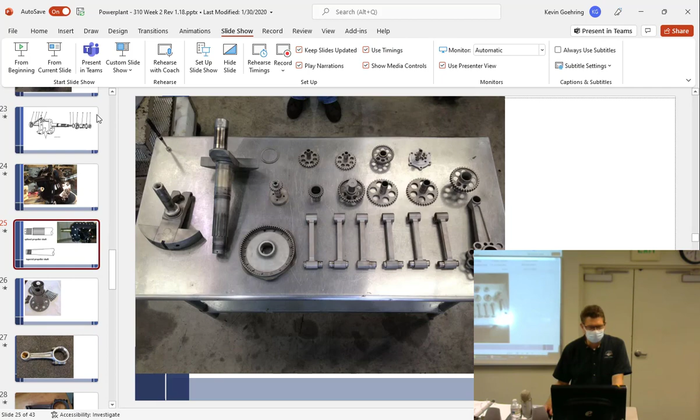I guess I want this one with, let's see, what do we got here? There we go. Oh, there we go. Nope. Slideshow. Where's from? Current slide. What did they do? There it is. There we go.

Little taper shaft. And a spline shaft. Well, that's a taper shaft right there. It's got a keyway built into it. These are a lot of fun. I have a part that I just went to go get, but I loaned it out. And so, unfortunately, I'm sorry I can't. But I got to tell you this part. You can remember this story because it'll save you someday.

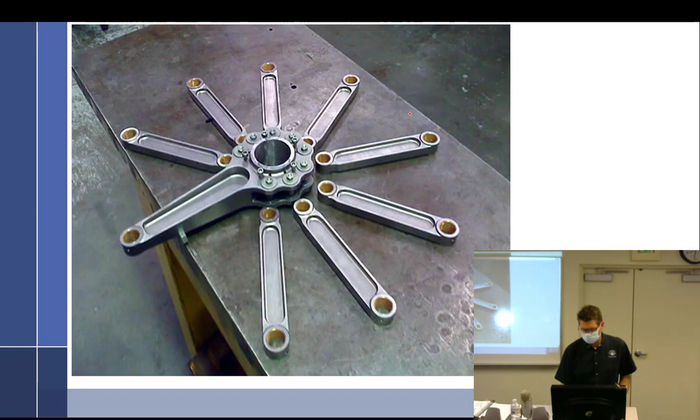If you're ever working on general aviation and you have to work on a tapered shaft, well, how the heck are you going to get a propeller on this tapered shaft? There you go, tapered propeller. No. They don't make such things. So there is a, I thought I had a picture. There we go. There's an adapter that goes on there, and this adapter is tapered. That's the only one I got. That sucks. Okay. So that has got a taper on it.

So you put this on the taper shaft, and you tighten this nut up right here, and it tightens the whole thing down on there. Now there's some things you have to know about that. What you can see back here, there's like another flange that the propeller is going to bolt through. And by the way, the prop bolts go backwards. They go from the back going forward, and the prop goes on, and then this little ring over here, which is a whole circle, goes on top of the prop, and that's the whole thing.

So you can leave the whole taper shaft adapter on if you so choose and take the prop off, but I always recommend taking this off every so often because they tend to want to seize up on there. And there are rules about when you put these on, and I'm really sorry that I loaned out my little shaft thing.

Let me see if this is going to work. Hang on. What do I want? That.

I like to pass it around. Tell you not to put your fingers inside of it. And then a little bit later, I explain to you what Prussian blue is. So Prussian blue is this blue ink, and you put it on parts. So what you do is, and there's a formula, you take like half of what you need, then you throw away 90% of that, and then you still have a little bit too much.

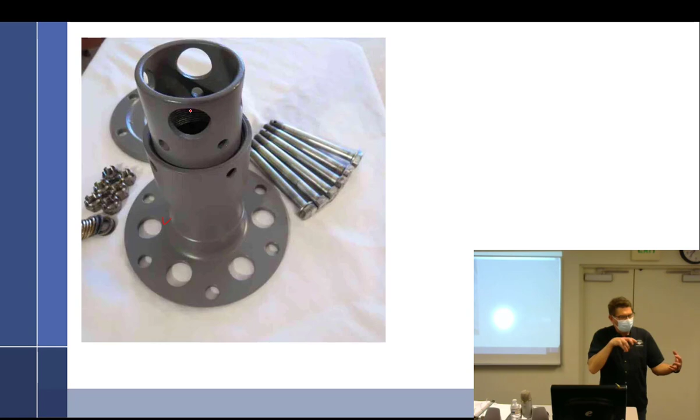the snap ring is not supposed to come out. You leave the snap ring in, and then when you loosen the nut, there's a flange back there on this nut that hits the snap ring. The snap ring then hits the groove that's in here, and as you start to undo this, it gets really tight. And what it does is, as you undo it, it pulls the entire assembly off. It's a built-in puller. And if you don't know that, you're never getting this off.

And that is why mine is missing, because Phil was working with somebody who has a little taper shaft, and they couldn't figure out how to get this off. Well, Phil knows. But I just walked by and noticed they'd taken the prop off and not the adapter, and they weren't getting it off. It's because somebody took the snap ring out and threw it away. So I gave my adapter, and it has a snap ring, so you can take the snap ring out, but give it back. So now you know all about that.

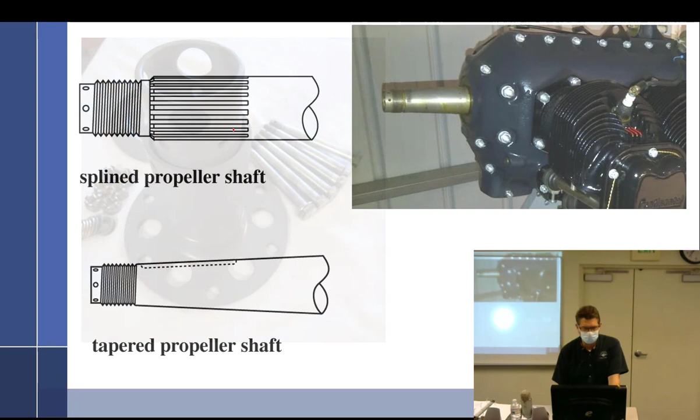So it does have a very large keyway that is built in. So this has got a keyway right there, so you have a key that sticks in there, and that locks it all together so that it stays. I've actually seen these keys sheared off clean, and it's kind of interesting.

So looking at the propeller shaft and the thing that came on there, where the bolt is supposed to go through, how does it go? A bolt goes through what? The big hole at the very top. Right here? That's just for tools to go through. That's how you tighten it. You just put a bar through here. I'm wondering, how do you put the bar through the propeller shaft if there's no hole? Oh, the shaft is down. It ends about here. Oh, okay. Yeah, see it's right here, so the tool is somewhere out here.

And then you see the little holes right there? They line up here, and you put a pin through it. The pin goes from the inside out, so centrifugal force holds it in place, not safety wire. All right, so we got the taper shaft. It has a large keyway. Obviously, if you had a prop strike, I'd just throw it away.

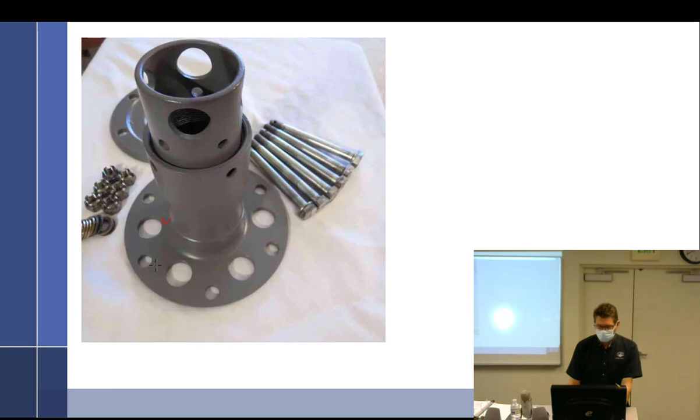All right, so you got the picture. So that's a spline shaft. And if you were to look at a section of it, I don't want to draw the whole thing, it's built like that, but symmetrical and nice. And so those are the splines. There are actually tools where you can measure these splines to see if they have wear. And you wouldn't normally get wear unless there's movement in there.

But the thing about these is there's what's called a blind spline, and that's really important. Sometimes the blind spline will have maybe just a screw or a bolt, but it fills in one of the holes. And that becomes what we call the blind spline. So you can imagine you've got a matching prop hub, in blue, that is going to go over that, and it's going to have matching splines that go down in.

Except, what are you going to do with this one? Well, that particular one is going to be missing a spline. So you have a section that's missing a spline on the prop hub. That's where that goes together, and that way they're indexed and clocked together. So you've got to watch out for the blind spline.

All right, spline shaft. So it has a blind spline. So if you can't get it together, there's your problem. They do come in different sizes. Different sizes according to SAE, Society of Automotive Engineers, numbers.

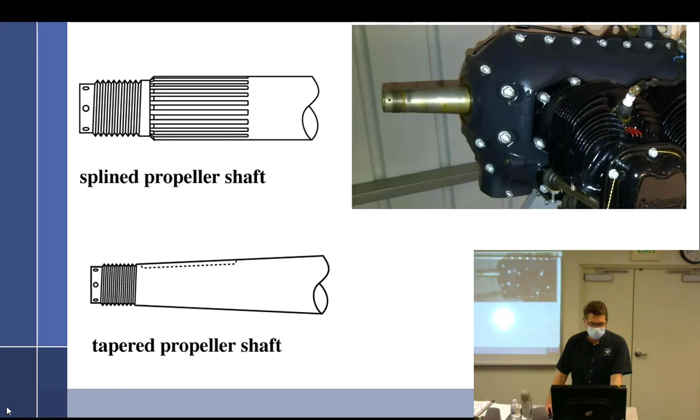And what that does, it corresponds usually to something on the propeller. Sometimes one of them is a bigger diameter. So you'll have five that are the same diameter, and one that's a bigger diameter, or maybe one that's a smaller diameter. And it's important to note that when you're putting this together, because often somebody will not realize that, and so they'll put the propeller on, and maybe this one's a little bit larger, or the way the prop lines up, they didn't have the right hole.

And so as they tighten it up... the prop has one, that's what it is. So one of these is trimmed down just a little bit, and it's made to fit in a hole in the prop that's just a little bit smaller. Right? And so if you get it clocked off one, say they're all sticking out the same dimensions, you have the small hole on the prop on the big bushing. Then when you tighten up all the bolts, it just pushes this one right out of the back of the flange.

And so you see that. You'd be working on a plane, and sometimes, especially on 4-cylinders, you can really note that it's kind of in the wrong spot. And then you go around the back and see one bushing pressed halfway out. So you've got to make sure you get it on the right one. There are service instructions from Lycoming that tell you exactly what the bushings are and where they're supposed to go. And props are clocked a certain way, sometimes depending on the dynamic counterweights. Most 4-cylinders are the same. But anyway, it's important that you get it together correctly.

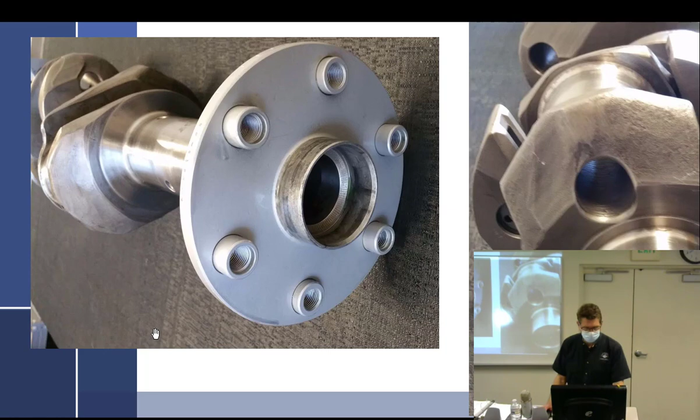Well, that's on you now, right? You need to make sure that it goes back on the right way. Yeah. Are props dynamically balanced on the crank or off? Dynamic means on the engine running. Okay. Static means off the engine. So it could have been dynamically balanced incorrectly mounted on the prop, or on the... Could have been. Yeah, okay. Not likely. Doesn't happen often, but could.

So if it was done incorrect and then balanced like that, would you have to then? Yep. Then take all the weights off, have it rebalanced. You guys are going to learn. We have a nice balancer here. I haven't even used it yet. But you guys will get a chance to do it in second year. Learn how to do it. It is really nice.

You can do my plane for me?

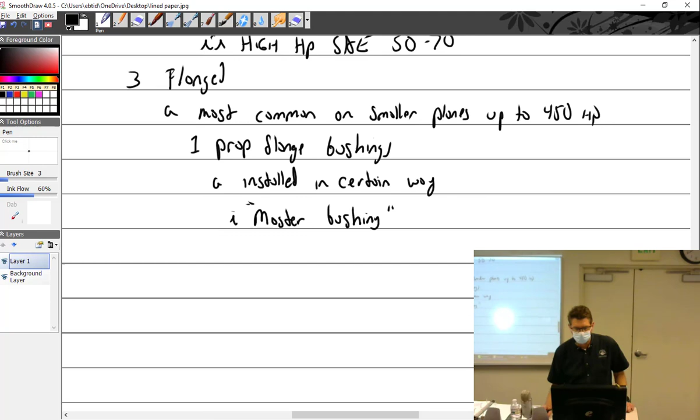Sure. All right. So prop flange bushings, they're installed a certain way. Installed in a certain way. I was just talking about the master bushing. Master bushing is different, and used to clock the propeller. Clock the prop.

Where do you think you could find this information? How to make sure it goes on correctly? Manual? What manual? Overhaul manual for what? For the propeller. The manufacturer's manual for the propeller? Okay. Anybody else? The engine manual. These are all good guesses.

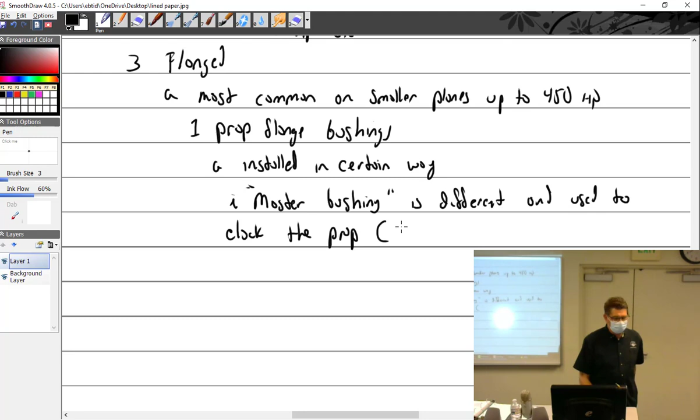Something you have to realize about this whole system is when a propeller is made, there's a propeller manual and the propeller company, and they're all into their propeller. And then it gets sold to the airframe. So, you know, I got a McCauley propeller, they sold it to Cessna. And I got a Continental engine, they sold it to Cessna. Cessna gets to decide how that stuff's going to go together.

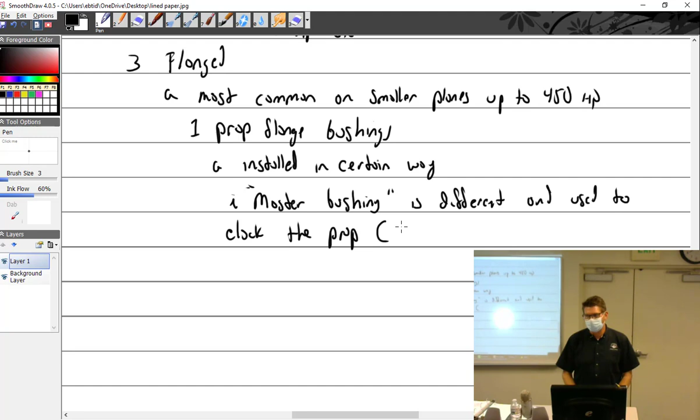But interestingly enough, these bushing placements are in Service Instruction 1098 for Lycoming, because they'll tell you where to put their bushings. That's an engine manufacturer saying where they want the bushings. But ultimately, the way it's installed is up to the airframe manufacturer.

Let me see. I think now I've totally screwed up my outline. Gonna skip something, so I'll remember for now, but I'll forget in a minute. Crank gear pad. What am I writing? Pad. All right, pictures. What do we got? We got this from down here. All right, so here's crank gear pad.

Now, it's nice that you guys have already started working on an engine, and maybe you remember how this goes. What goes right here? The gear. How is it held on? A bolt. And what happens if that bolt falls out? Nope, there's no oil there. Okay, no gears are going to be rotating. What's that stop? Everything. It's a bad thing, right? It's a pretty big deal.

Although on top of the crank gear is the oil pump. So the oil pump kind of holds it down, which is kind of interesting. But once it's loose, it starts to work its way out. So this has caused quite a few problems. And for many, many years, it was just Lycoming that had a problem. Then Continental joined in, even though they have, I think, 4 to 6 bolts back here, depending on the engine model. They just had a problem with some bolts.

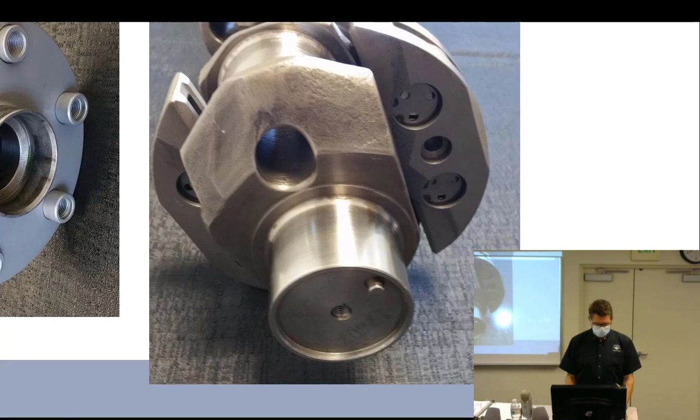But here's Lycoming's problem that you need to know about. There's only one bolt. And it's never a problem until it's a problem, right? And you guys are fortunate, you have the gears that they don't want you to use anymore. Your gear is a complete circle, and it filled this all up. And you're really going to want to pay attention to this, because when you get to the instructions, you're going to go, I don't understand these directions at all. So I guess I have to get rid of that and go to this.

All right, so you have a gear that is a circle. And of course, it's got a little hole right there that lines up with that dowel pin, and then you've got where the bolt goes here. So what happened is they were finding out that mechanics weren't paying attention, and they were just sticking this gear on the back of the crankshaft, sticking the bolt in, giving it some torque, locking the tab and moving on, and the gear would maybe catch a little bit off to one side or wouldn't seat all the way down. Well, if you torque something and it's not really tight, what happens to that torque? Null and void.

It's null and void, it's not torque, that gear starts rattling around, breaks off, and then the engine quits and the airplane falls to the ground. So they had to fix that, and their fix was scallops.

So what they tell you to do, and you're gonna have to follow these directions mostly, is you're gonna take and put the gear on. Then they want you to clean out the threads, then put the bolt in and measure it to make sure it's going down far enough, then take the bolt out. Then you're gonna put the gear on, and they tell you to use a hammer and hit it. You're gonna listen - I keep telling you guys, use your ears. So you hit this and listen for a sound I'd describe as solid, so you can hear it resonate through the whole crankshaft. Yeah, that thing's really sitting hard.

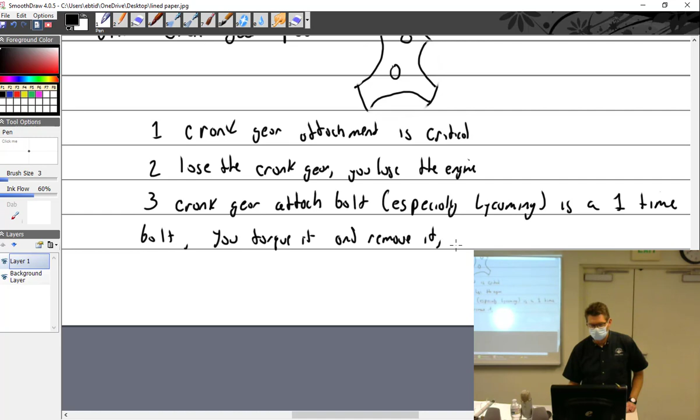And this is where Kelly, especially Kelly, boy, if you're not honest with her, man, she will let me know about it, you know, and she's not... I'm right behind her, but she just really brings it home and will tell you all the time.

It's hard being an aircraft mechanic sometimes. You make mistakes. We are human. That is the downside of being human. You are going to make mistakes. I made a bunch of them. The thing you don't want to do is let one mistake become another one. So when you make a mistake - hey, I torqued this down, I accidentally over-torqued it, or my torque wrench was set for the wrong thing, I thought it was right, I just missed it, I went over by 5 foot-pounds - be honest.

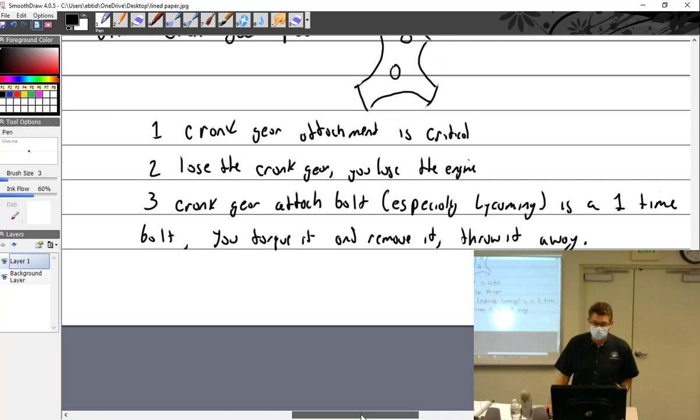Take it out, throw it away. Yeah, sometimes the boss will be pissed. I had to be in that position, and yeah, it kind of pissed me off sometimes, but then I would always have to come back 5 minutes later and say, you know what you did was a good thing, that you told me and did the right thing. I'm really happy about that, and you're not in trouble. So make sure you do that.

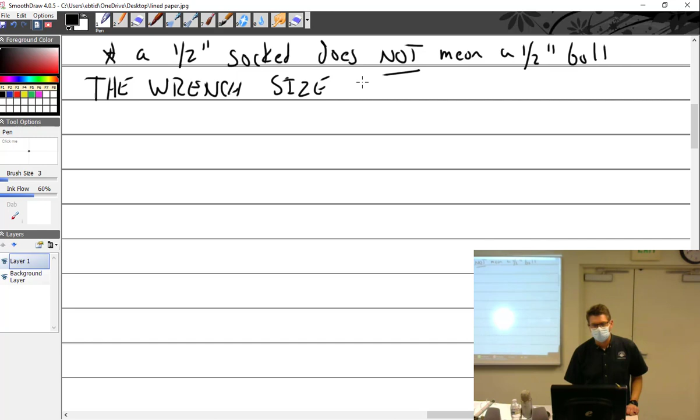I have an asterisk here. A 1/2 inch socket does not mean a 1/2 inch bolt. The wrench size is not the bolt size. Some of you haven't heard me say that 100 times yet. I have a coffee cup I drank out of this morning, it's on my desk at home that says the wrench size is not the bolt size. So I'm just going to get rid of that number 4 right there. The wrench size is not the bolt size.

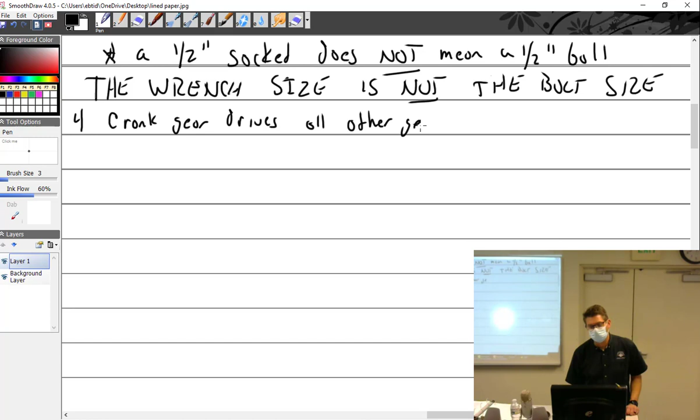It is very critical. I had a hard lesson this one time. So when I was a young man - I told you I came from the body shop world, my parents had a body shop and a AAA tow service - I was already in the Navy, and I was home doing something. My dad called and said, hey man, you got to come down to the shop real quick. I said, well, I'm headed to the ship, I'll stop by on the way. So I stopped by, and some well-to-do dad had bought his spoiled little daughter a Z28, and she put it in a ditch, and he stopped by the shop and said, she don't get it back. So if you know anybody who wants a slightly wrecked Z28, there it is.

My parents said, you want it? I said, yeah, I'll take it. I deployed and was gone for 6 months, and I just kept sending my paychecks home. I got home after deployment, and it was in the garage. It was an '82, which was not the greatest Z28, but it was mine. My stepdad had put candy apple blue stripes on it. It was a pretty sweet little car, all set up and ready in the garage for me. But there's a point to that.

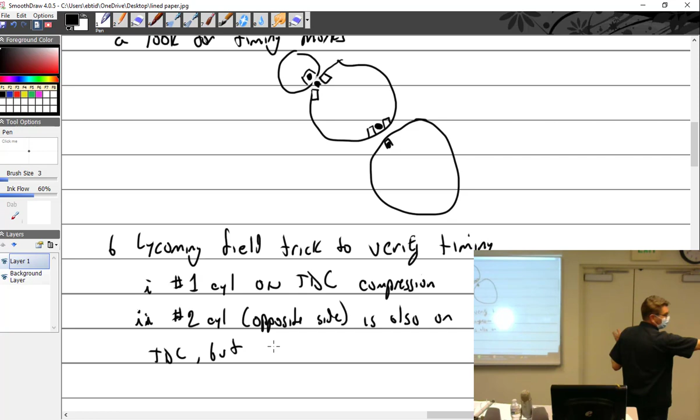Okay, let's go through it slow. So what's that? No, it's top dead center. So number one has just gone compression, and now it's ready for power. This one has also gone out, but it's the opposite - so what's the opposite? The exhaust. What's it getting ready to do then? Intake. Okay, so TDC - I don't put 'but' - let's just put TDC of exhaust, about to be intake stroke. And then it says...

Move prop, P-R-O-P, 5 degrees in each direction. So you move 5 degrees forward, 5 degrees back. The intake valve should just start to open when moved forward. And the exhaust valve should just start to open when moved backwards. Make sense? So how much valve overlap do we have? None. Absolutely none.

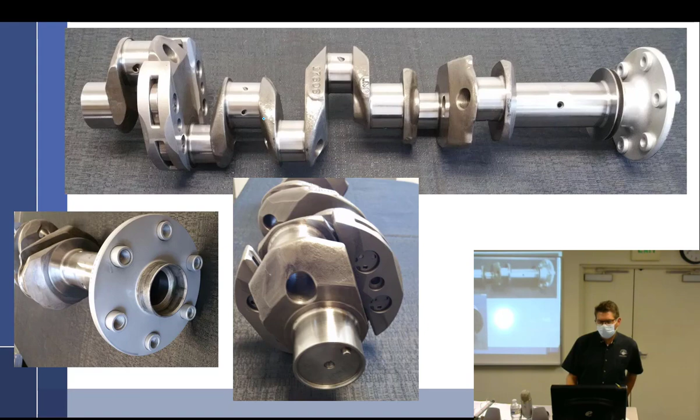Continental, I think, had problems with counterweights not being nitrided. But Continental's big problem became this VAR issue. VAR stands for vacuum arc remelt. So what happened is they had a bunch of crankshafts, and I don't know a lot about this process. I suppose I should learn it, but I don't make them. I just work on them.

I'm assuming from the name vacuum arc remelt, when they pour the metal into the crankshaft, you can often get voids in there, or inclusions as it's called. By remelting it under a vacuum, you can pull out some of these impurities and make a more pure crankshaft. So what they had is some voids, inclusions, various spots in the crankshaft. If it's not a solid piece of metal right here or over here, that created problems and the crankshafts were breaking.

So there was a big deal where you had to buy a VAR crankshaft. You had to get rid of the one you have. I don't remember anymore what the time frame was. It became an airworthiness directive. But what is still in place is that anytime a 6-cylinder crankshaft is removed from the crankcase, which means you split the crankcase, they want the crankshaft ultrasound inspected. So not only would you have to do a magnetic particle, but it has to be inspected by somebody who's been specifically trained by Continental to do the ultrasound inspection on their crankshafts.

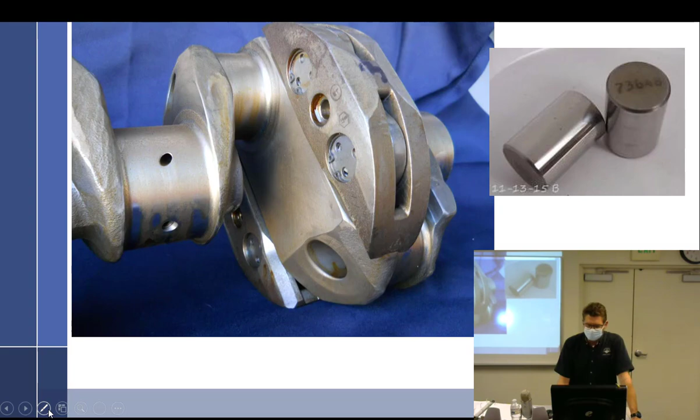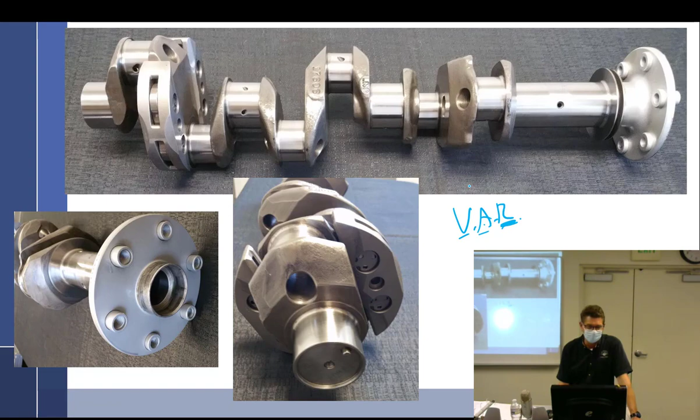All right, where am I at here? We talked about sludge tubes. Talked a lot about our counterweights. I want to stress, working on counterweights, you got to be very, very careful and take your time and make sure those snap rings are really in there, and the plates are the way they're supposed to be. They're supposed to do all these dimension checks. They're supposed to be tight. I can't overstate that. But then I think about the crankshaft gear, I can't really overstate putting that together either. What on this crankshaft can you just haphazardly put together while you're talking on the phone and looking at your Facebook? Nothing. You got to be all in.

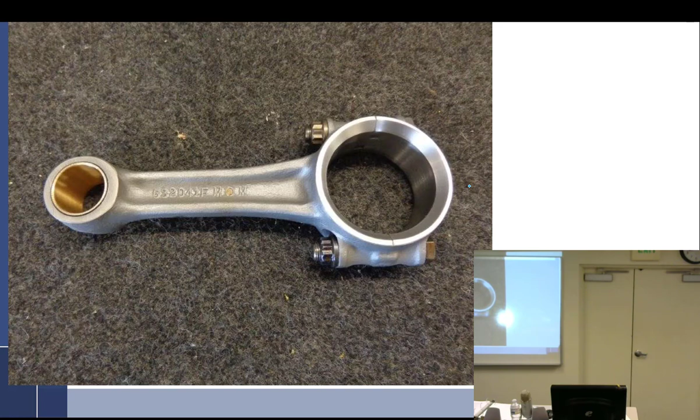All right, talked a little about radials. Let's talk about the connecting rods. Let's talk about paying attention. This is my favorite thing. Most of you guys have seen this already, but moving forward.

Oh, wow. I didn't see it at my angle. It looked like it was just slightly curved on the back. It's a little bit. So the guy who gave it to me, Al, just the nicest guy in aviation. I wrote on the inside, Al, how much did that cost you? And he said $27,000. $27,000.

And I told, did you Magnaflux it? There are no cracks in this. It is split wide open, and I cannot find a crack anywhere. Told you they're soft. They're pretty soft.

So what happened is they did a cylinder change on a Bonanza, and you'll find out there are many ways when you're working on your engine to do this. To put this cylinder back together, you could take the piston and put it back on the connecting rod and have it hanging there, then compress the rings, and bring your cylinder up to it and slide it on.

Or you can have your cylinder on the bench, put your piston in most of the way so the rings are in and the boss for the piston is hanging out, bring the whole assembly up and pin it, and then slide it the rest of the way on. You follow? Either way is fine.

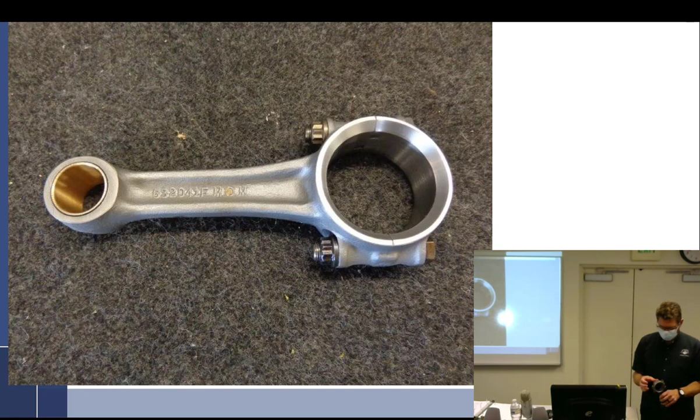Well, this particular mechanic decided he wanted to do it that way. This is a big bore Continental, I don't remember if it was a 520 or a 470, but either way, there are reasonably heavy cylinders. He put the piston pin through the piston at about a position like that, missed the hole, and they started up the engine, and the engine went, and the piston didn't. Hammered the shit out of it. And then $27,000 later, I have a connecting rod. So pay attention.

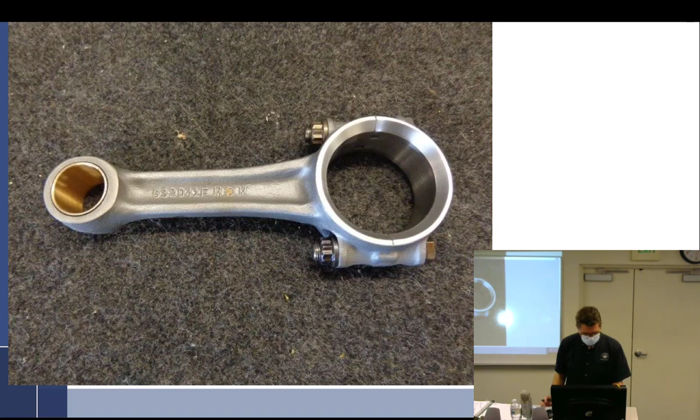What time is it? Let's do it. All right. Connecting rods. Now, there's a lot of stuff I tell you, but there's a lot I don't always have time to get into, and there's a lot more behind these parts that I wish I could show you. I'll talk as much as I can about it.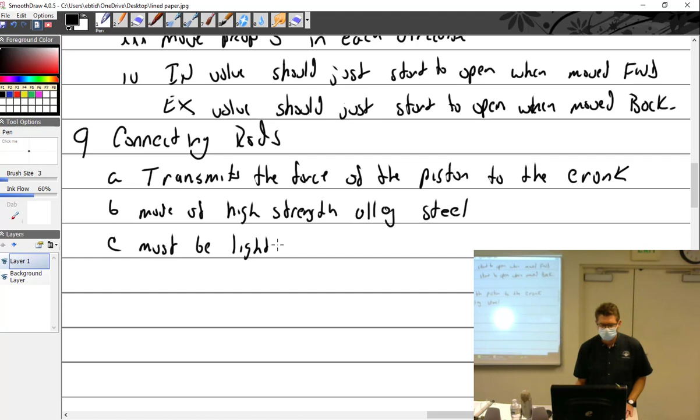So, the conrod transmits the force of the piston to the crankshaft, to the crank. They are made of high strength alloy steel. They must be lightweight. This is what the guy at Lycoming said. You've got to be lightweight because they stop, S-T-O-P, and change direction.

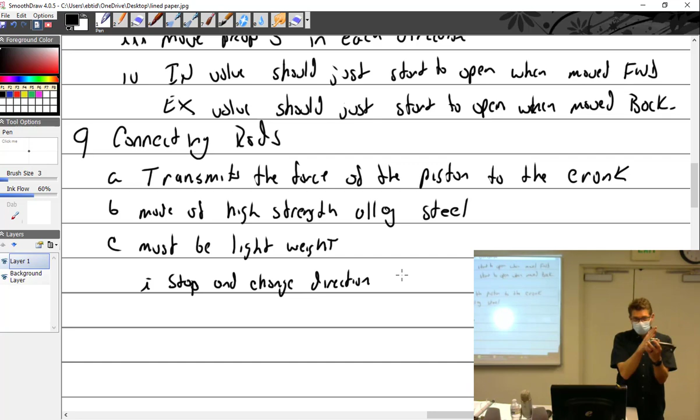Continuously. I don't necessarily agree with that. They kind of do stop and change direction, but they don't come to a sudden, abrupt stop. They slow down. When the rod journal is straight up and down, it's moving pretty fast, but as it comes out and around, it slows down, comes to a complete stop, speeds up and goes back the other way, and then slows down. So yeah, it is starting and stopping a lot.

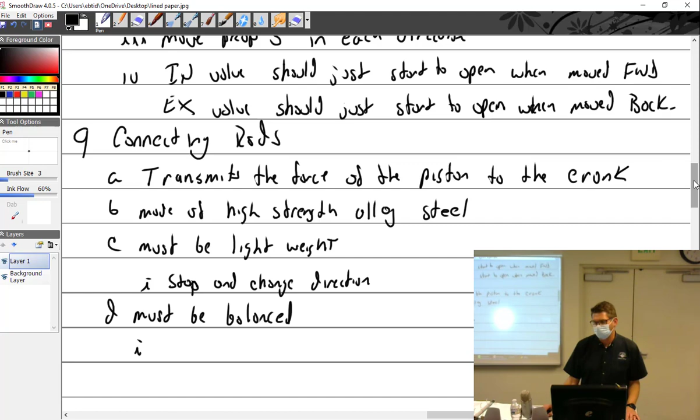I don't know how important the lightweight function is. I just wrote that because that's what they said. But they must be balanced. Not all manufacturers are nice enough to give me numbers to work with. So if Lycoming gave me numbers like this and Continental didn't, I would do all my engines to Lycoming standards. Whoever had the data, I would hold it to that data, which you can do.

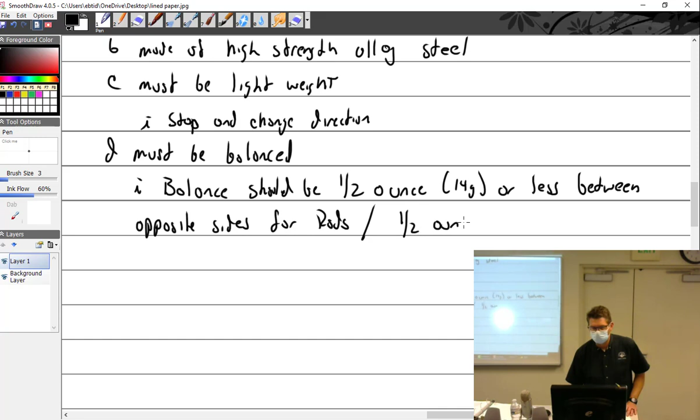So balance should be 1/2 ounce, which is 14 grams or less, between opposite sides. And that's for rods. And while I'm at it, 1/2 ounce, which is still 14 grams, or less, for pistons. And I got that out of TCM's manual, Teledyne Continental Motors, Chapter 10, page 10-56.

By the way, I always talk about Lycoming service bulletins and instructions, and there are also letters; I explained the difference between them all. Bulletins and instructions are your important things. Continental used to be the same way. I really appreciated Continental service bulletins, because their manuals were more specific to each engine, so their service bulletins were relatively smaller. Working in the field, you remember bulletins: oh yeah, we've got to torque it.

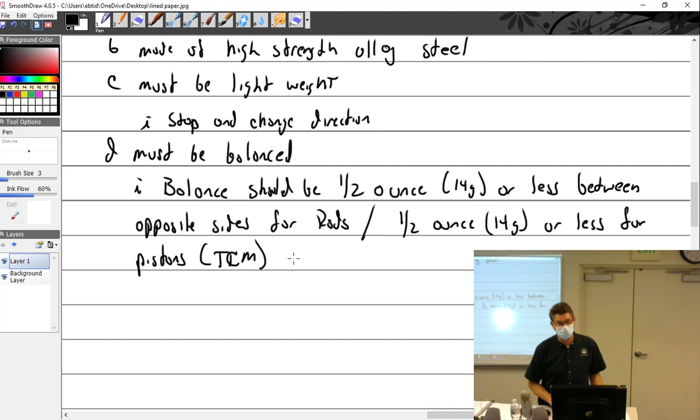There was a great service bulletin I liked for putting crankshaft gear seals in, telling you to put cross hatches in the crankshaft, and a lot of information. Then one day they just stopped, and they no longer do service bulletins. They have the M-0 manual, the Standard Practice Maintenance Manual. They took all the service bulletins and put them in a book where it's really hard to find what you want. But it's there, and it's a pretty thick book.

So if you're going to be working on a Continental, you've got to have both the Continental manual and the M-0 manual. Sometimes I call it M-O, but I think it's M-0. So that's what this manual is. You've got to get the right manual.

And I guess it's break time, so I will shut up.